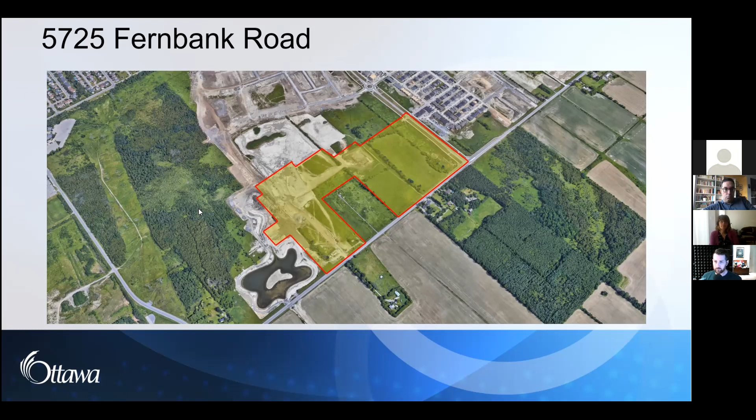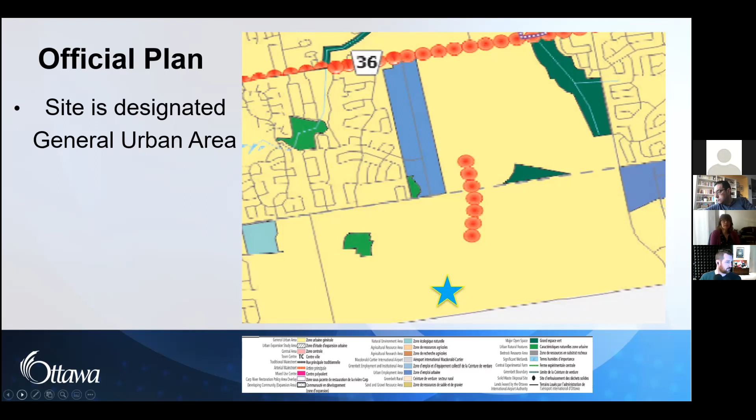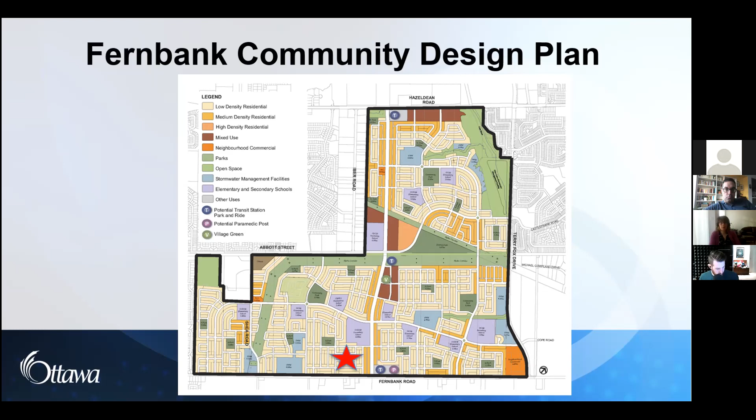So the proposal we're looking at now is very much in keeping with what was intended in terms of the layout and just what we intended to see in this particular segment of the community. Next slide, please.

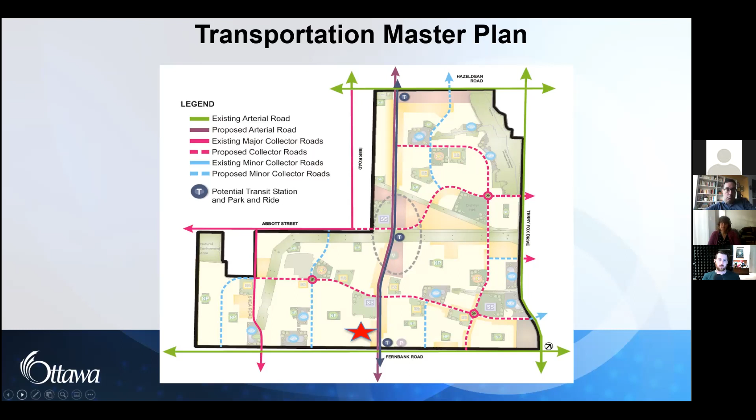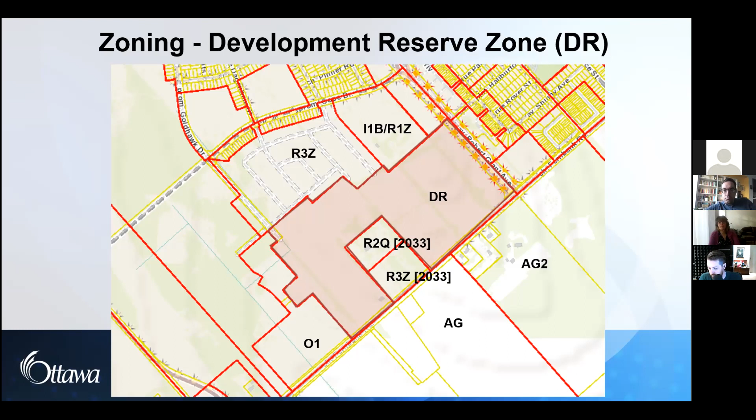So what zoning changes are requested? As mentioned, we have a subdivision application to create the lots, blocks, and streets. We also have a zoning application to change the parcel from the DR zone to residential third density, R3Z, which will permit detached, semi-detached, and townhouse dwellings. There will also be a park block, which would be zoned open space.

The subdivision is proposing approximately 600 dwelling units — a mix of about 205 detached, 260 townhouses, and 130 back-to-backs, all permitted within this R3Z zone. Later in the subdivision process, it will be divided into lots for single family and blocks for townhouses. Next slide, please.

So that's it for the process and just an overview, and I'll let Vincent present the specifics of the proposal.

Thanks, Kathy. That was great. Basically did a great run through of what the project was.

So my name is Vincent Deneme. I work for Claridge Homes, and I'm representing CRT Developments for this meeting. CRT stands for Claridge Richcraft Tamarack. This is a co-tenancy development where we're the developer and we sell lots to those two other developers as well as ourselves, so you'll see a mix of three developers building homes here. This somewhat rationalizes the volume in units because we're all getting a share, so when broken down we're all getting a reasonably sized project, but in total it is a big project. Next slide.

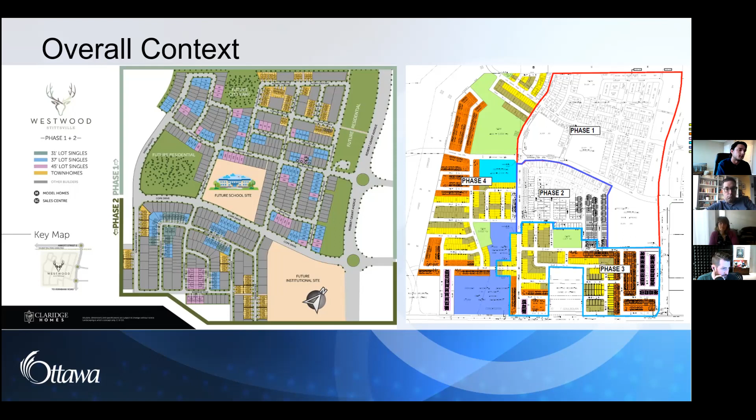So this is our draft plan, just a snapshot of what we've applied with. The future school is to the north, our phase is in red, and there's another developer that has a piece sandwiched in that's also proposing similar housing typology, townhomes and single family homes. So much of the same, basically just a continuation of the project from the north.

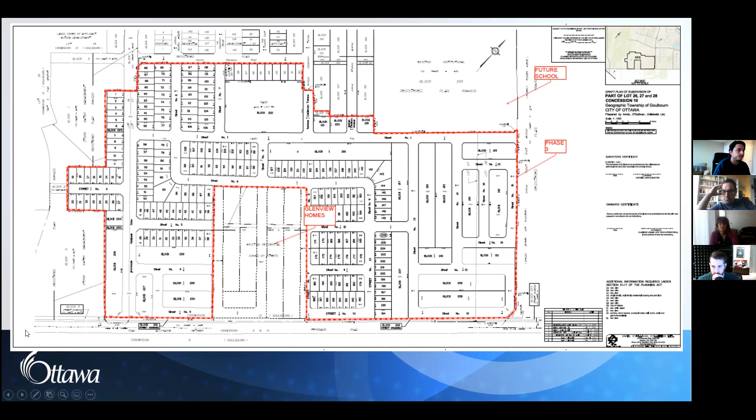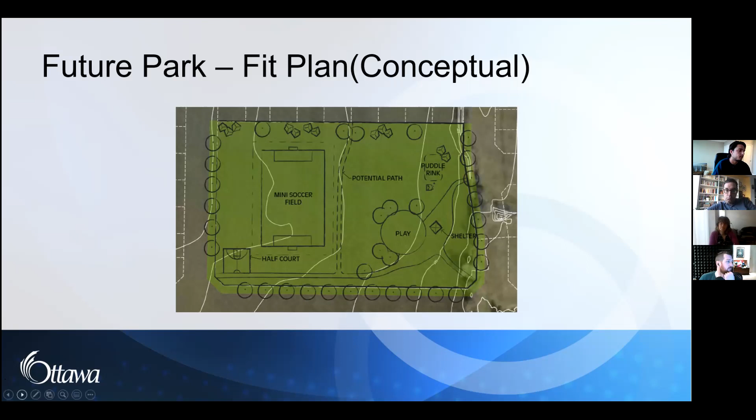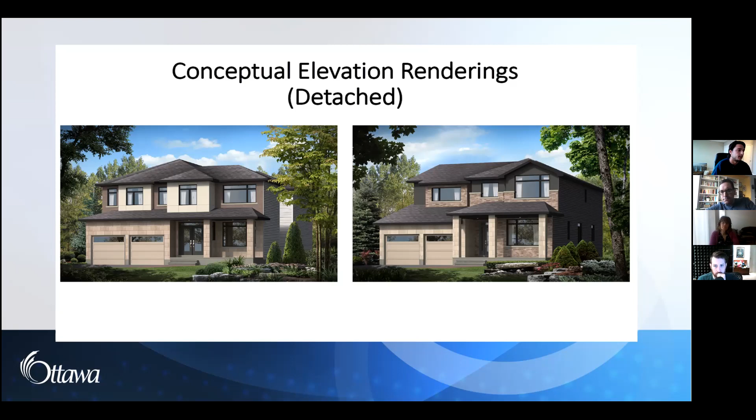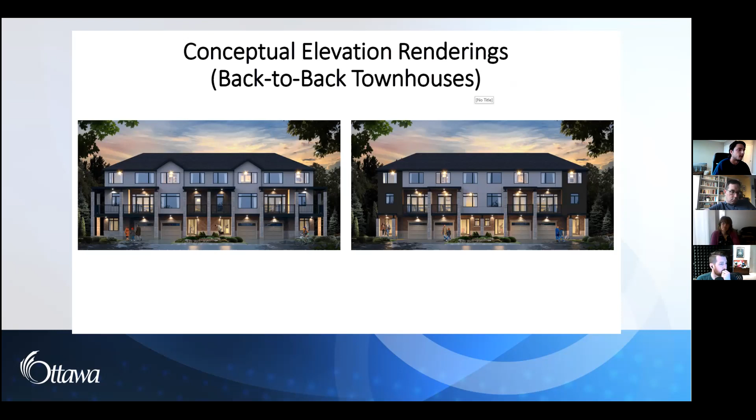These are back-to-back dwellings, a bit more dense—basically a townhome that's 3 stories sandwiched together, so they don't have backyards. They'll both have streets fronting with a garage and a patio. Here you'll see there's 4 units on one side, and another 4 units mirrored on the back side, so one block would have 8 units—double the typical amount of units than a townhome.

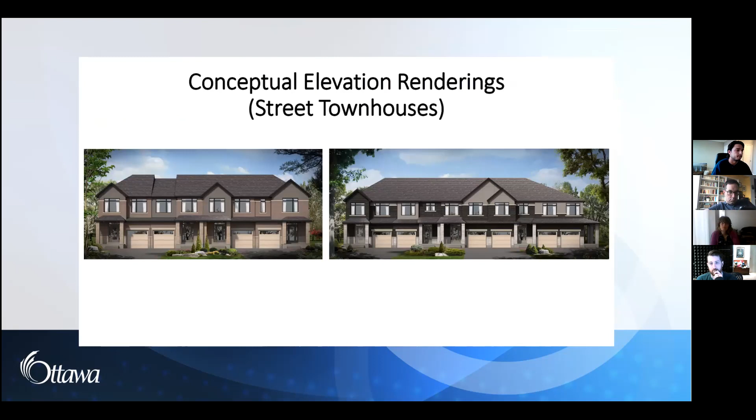And then this is just our regular street townhomes that are roughly 20 feet wide, have a backyard, and are seen around the city. I think that's it. So thanks, and I'm open for any questions.

Sorry, I had to unmute myself. So in terms of what happens next with the subdivision, we'll continue to gather public comments. Any issues will be resolved, and then the draft plan and the conditions of approval will be finalized. Then I prepare a staff report, called a delegated authority report, recommending approval. The report and suite of conditions is approved by the manager of development review, and before they approve it, we obtain concurrence from the councillor with the conditions of approval. Then a notice of decision is sent to anyone who provided comments.

Parallel to the subdivision process is the rezoning. The two applications were circulated together so that anyone who received notice knew there was both a rezoning and a subdivision. Again, we're gathering public comments, and after the subdivision has received draft approval, I will prepare a rezoning report that is considered by planning committee, where we make a recommendation regarding the rezoning. Planning committee considers that staff report, and if they approve it, it goes on to council, and city council enacts a bylaw which changes the zoning from the DR zone to R3 and parks and open space. Following the council enactment, a notice of passing is circulated, mailed to all owners within a 120-meter radius of the site, plus anyone else who provided comments or attended this meeting and signed in. Then, following the 20-day appeal period, assuming there are no objections, the bylaw comes into effect. So that's what happens next.